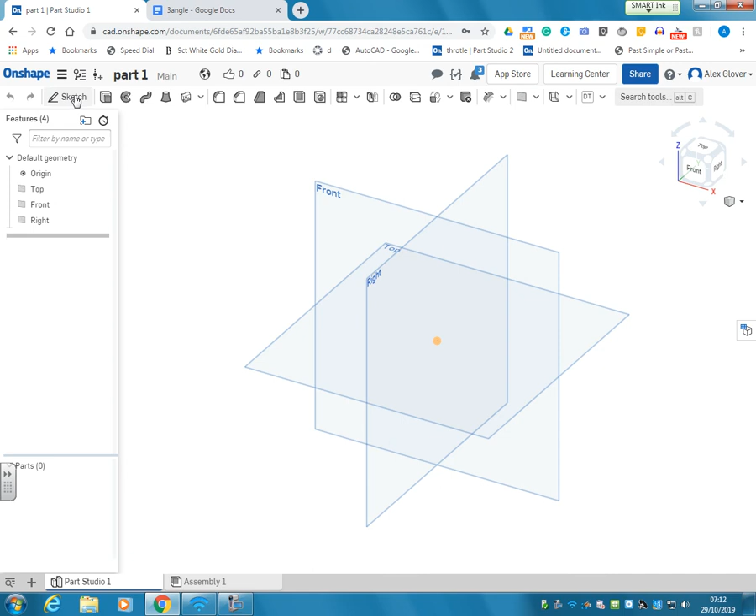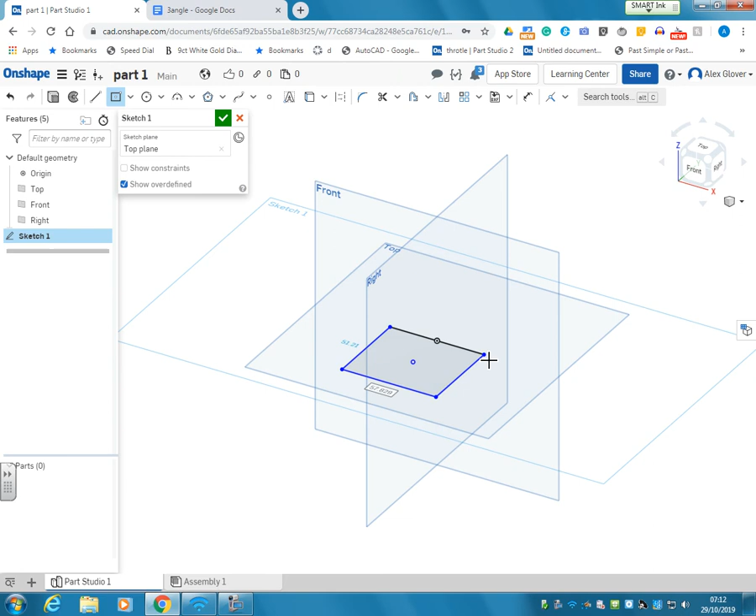So there are two continuing features on drawing 1, and that is from the top or from the front. So either way, I'm going to draw it from the top. We're going to get a bit of that feature in there. So we're drawing it from the top. And the dimensions from the top, the width of the whole thing is 50. And the depth 35.

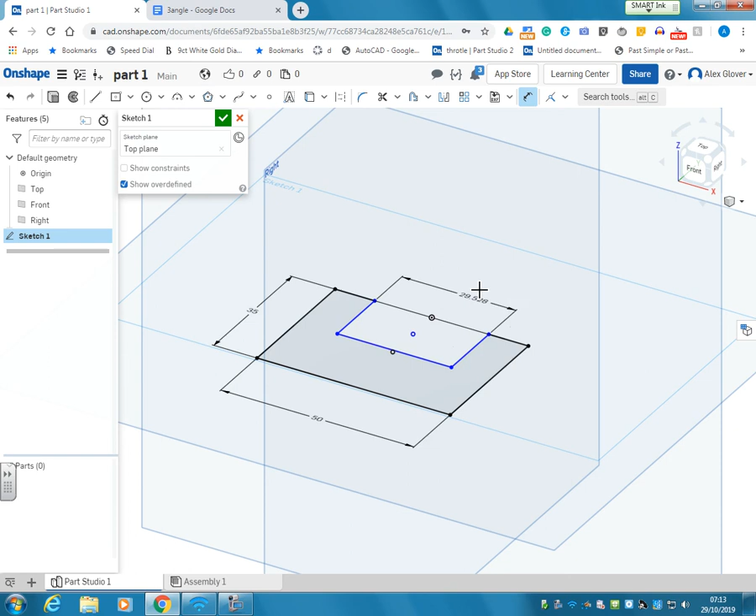And we've got the feature at the back, which we can remove a bit. Now obviously what I've done there is I've used the center rectangle. That's for my design intent because it's going to keep everything centered. Now once I do that, I can dimension between these 2 points. I was close, it's 30. And then between here and here, and that is 10. Once that's done, we can extrude. The height is 40.

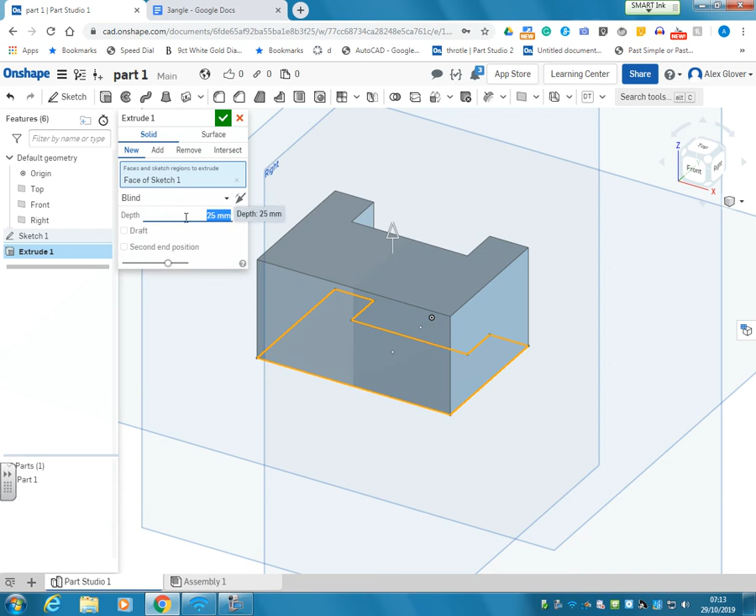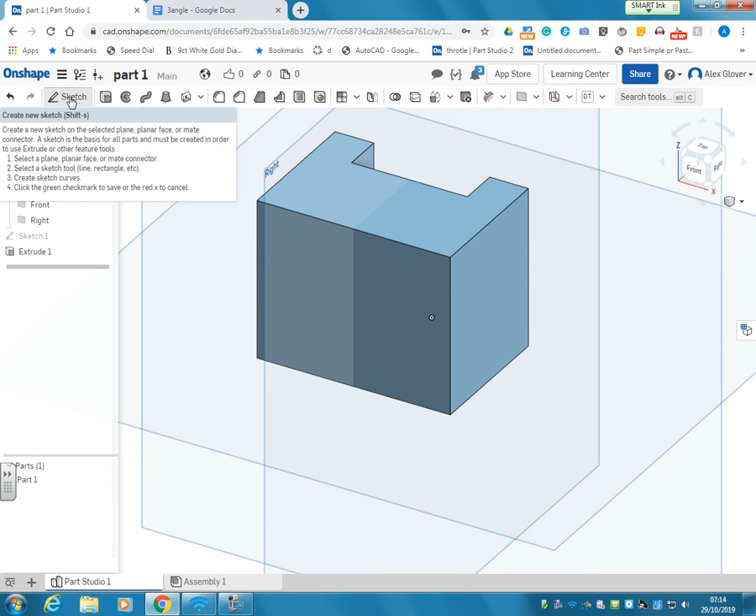So next step is to draw the cutouts on the front that are around here. We're only going to draw one of them and then mirror it, because again that keeps our design intent that if we change one of them, they change symmetrically together. So sketch on the front. Actually, I might draw them both at the same time. It'll be easier. So corner rectangle and corner rectangle. Now you notice that orange line there, that's going to keep them both at that level. That's the constraint we're applying.

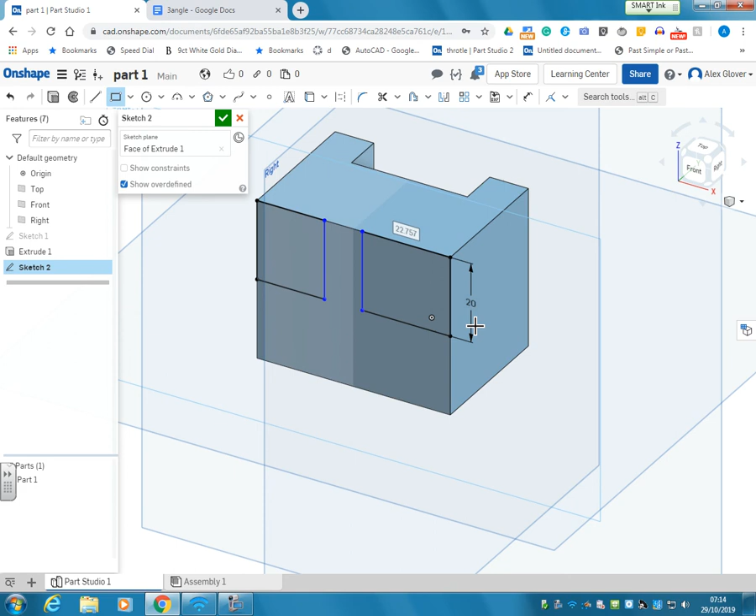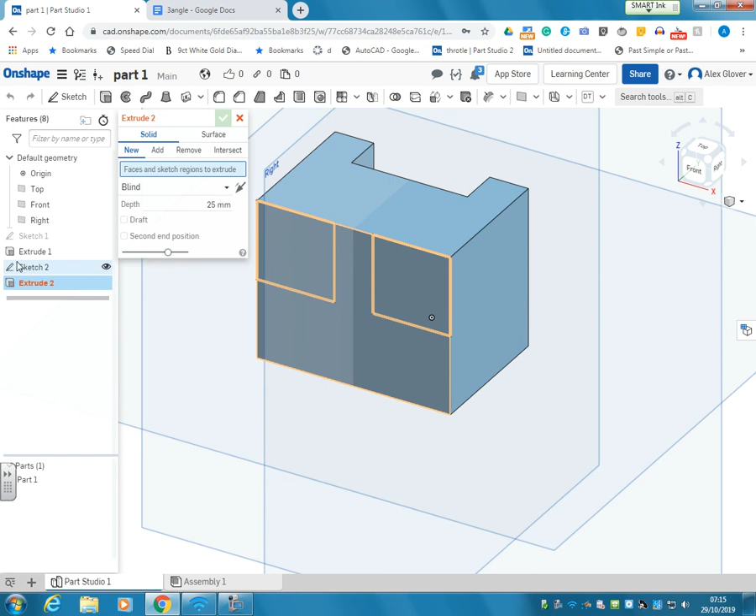And I think the drop down is 20 mil. And by 20. And the gap between here and here is 10. Now as you can see, it's all gone black, which means that it's fully constrained. We can now extrude sketch 2, remove, and it goes back 15 millimeters. There we are. The last bit is this feature here.

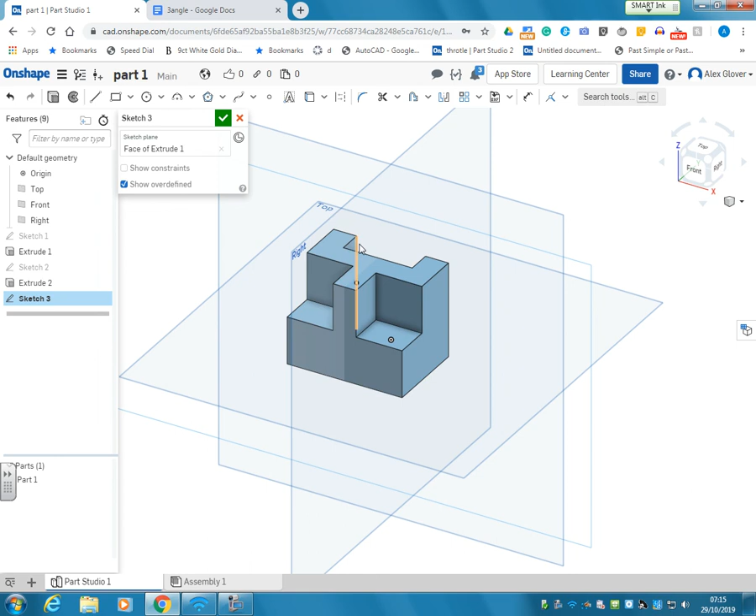Now I could draw it from the front. In fact, I will draw it from the front. So sketch on the front. Now I could draw the rectangle in there, but from the drawing it looks like it's linked to this back, and it's going to be constrained by that. So what I'm going to do is use construction. I'm going to pan round the back and just click on those 2 faces. And now as you can see, that's put those lines to the front.

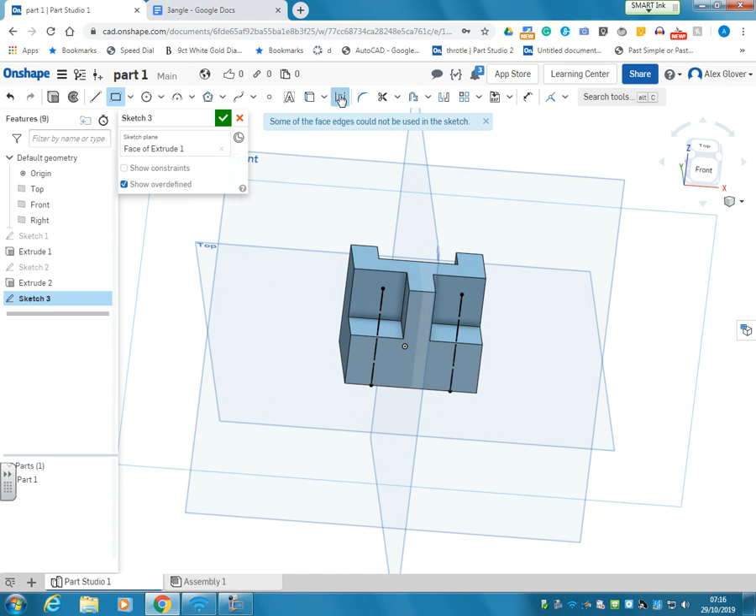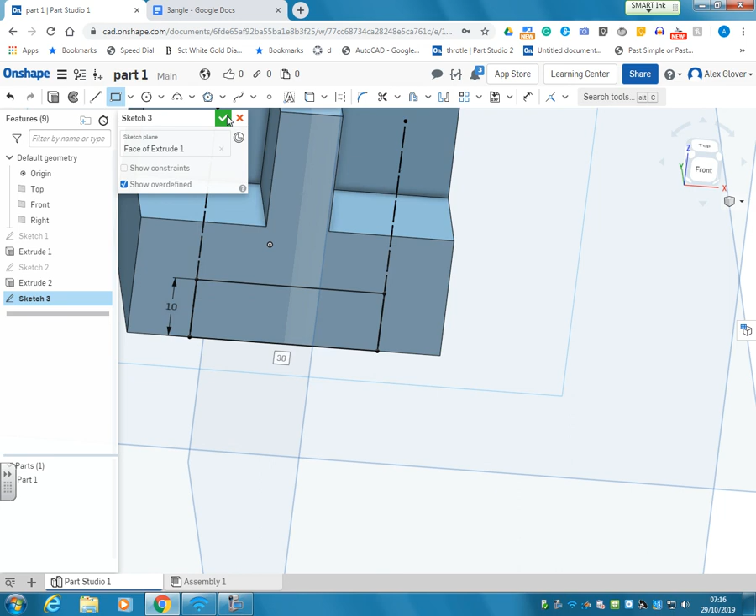Now I can get a corner rectangle, take construction off, and draw between here and here. So that's automatically 30 now, and the height is 10. Now the reason for doing that and not typing in 30 is that if I wanted to change one of these, they'd both change in relation to each other, because from my design intent point of view, I'd want these always to change together. So why not link them? And so that's okay. And now we can extrude that and remove it through all.

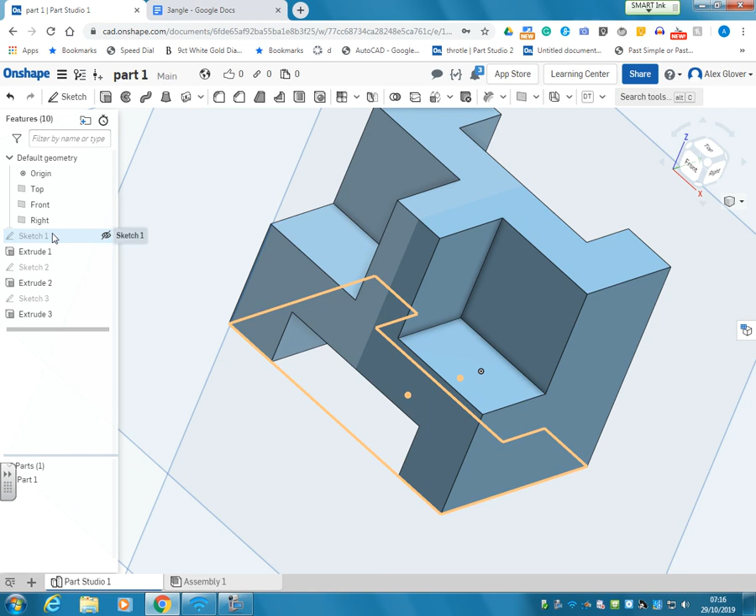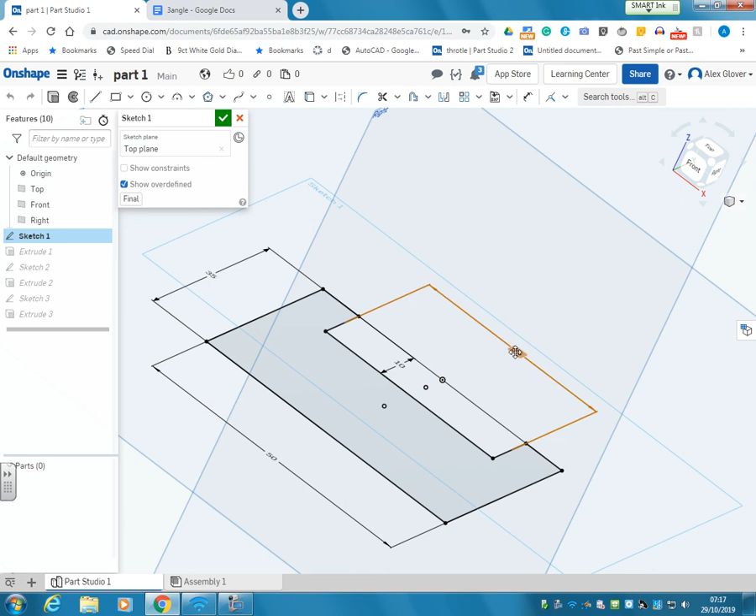And that's that done. What that means though is that if we did change this back, the front would change in relation to it. Let's just test that out. If we went here to 35, we can see the front's changed in line with it. So those little tricks are valuable, trying to keep design intent going, and it can save us a lot of time downstream. Okay, that's number one out of the way.